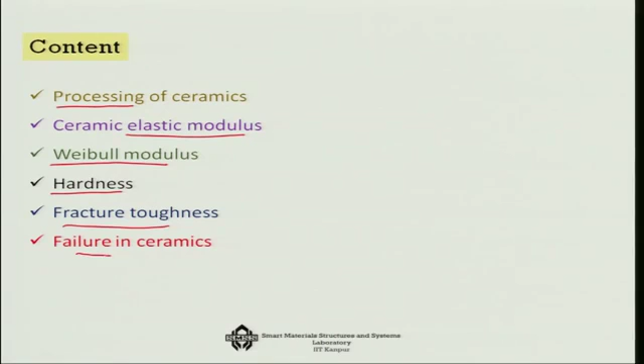Okay, we have discussed the basic introduction to ceramic materials in the last lecture. Today we will see some of the more advanced topics. For example, we will first talk about the processing of ceramics, then we will talk about the elastic modulus of ceramics, and more importantly for ceramics, because there is always a probability associated with ceramics, a kind of uncertainty about any value of the mechanical parameters, the concept of Weibull modulus. Then we have to talk about the hardness, fracture toughness and failures in ceramics.

Now, the first point is the processing of ceramics, because many of the properties of ceramics are actually dependent on the processing parameters. Unlike metals and glasses, which can be cast from the melt and subsequently rolled or pressed into shape, ceramics are generally made from powders, and there are two ways to do it. One is sintering, with pressure and heat, and another, which I will talk about later for piezoelectric ceramics, is the sol-gel process, which does not need heat. Right now, the more traditional one is sintering, and that is what I will discuss in this lecture.

So, ceramic powder is consolidated and densified by sintering. What is sintering? It is a process whereby particles bond and merge under the influence of pressure and heat, so high pressure and high temperature. This leads to shrinkage and reduction in porosity. Here are the powder particles to begin with; as you apply high temperature and pressure, there will be some pores and the particles merge. These are the neck areas and the grain boundaries, and as you apply more pressure and temperature, it gradually shrinks, though there are still pores.

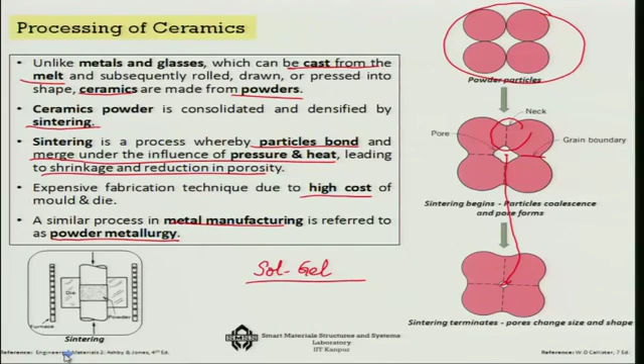So this is how ceramics are processed, and in this process the pores are inevitable. So what is the influence of porosity? There will always be some pores or void spaces between the powder particles even after sintering and subsequent heat treatment. Porosity has a negative impact on the elastic properties and strength. For example, the modulus of elasticity of Al2O3 at room temperature continuously comes down as porosity increases. Similarly, as the volume fraction porosity increases, the strength comes down.

One interesting thing: unlike the modulus of elasticity, the strengths are not single points; they are more distributed. I will talk later about how this distribution is probability related, and that is why there is a Weibull modulus. Now, the volume fraction of porosity plays a very important role, which is the volume of pores over the volume of the specimen. The higher the volume fraction, the more degradation of the material properties you expect, particularly strength.

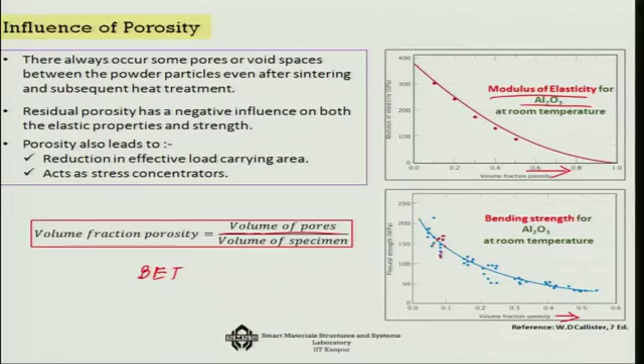And how do we measure the volume porosity? There are several ways. One is called the BET technique, by which we subject these ceramic materials to adsorb gas, and depending on how much gas is adsorbed, we find out the porosity of the particular ceramic sample.

Now, how do we measure the ceramic elastic modulus? It looks like a very trivial question, but it is not trivial at all. Why? Because when you make a sample for elastic modulus determination, say for example this steel sample, you have to make a certain necking arrangement. So this is a dog bone shaped sample.

So, you have to make this dog bone shape, and this kind of a dog bone shape is very difficult to make, with these neckings etc., for the ceramic sample. So, sample preparation is the first important problem. The second problem is that in tensile testing we put these areas for gripping, but this gripping for ceramic material is enormously difficult.

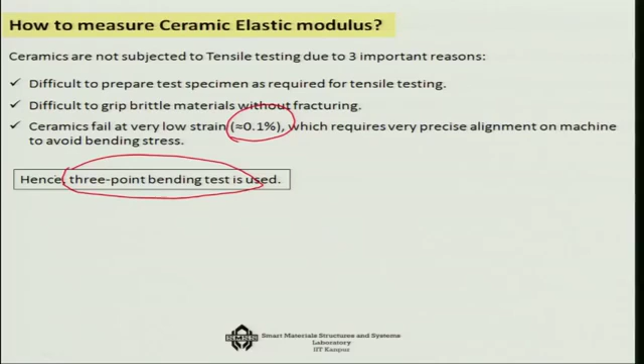And the other point is that ceramics actually fail at a very low strain, something like 0.1%. So, it is very difficult to align a machine and to avoid bending stress. Hence, for testing of ceramics, an indirect way known as 3-point bending is generally used. Let us see what this 3-point bending test is.

As the name suggests, this is a ceramic sample, as we can see here, and it has 2 supports, and exactly at the center a load is applied. So, it is 3-point bending that is happening, with 3-point supports. At the top surface of the specimen, this part is subjected to compression, and the bottom surface is subjected to tension.

Now, you can compute stress from the specimen thickness, bending moment, and area moment of inertia. So, if it is of length L, then L by 2, L by 2, the load is exactly at the midpoint, and the sample geometry, suppose B over D for a rectangular cross section, or it can be a circular cross section depending on what you wish to choose. Now, if it is a rectangular cross section, then with this configuration and with the force applied F, the bending moment is FL by 4.

So, this FL by 4 is the bending moment that this thing is subjected to, and if I know this bending moment M, and if I know where exactly the particular fiber is located, for example, if it is an extreme fiber at distance y, then the stress is My by I. So, I can actually find out what stress it is subjected to.

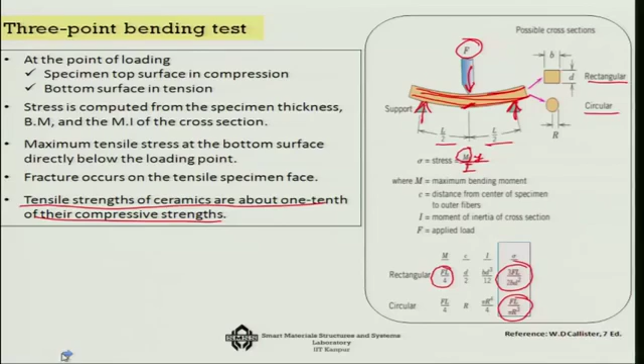Next, we can find out the stress, and if we use some displacement sensor, you can find out the strain, and then plot the stress strain diagram. What you will see is that the stress strain diagram, unlike for metallic samples, is remarkably different here. You will generally find it to be a simple straight line, like you see here for aluminum oxide or glass, with a sharp point of failure. So, there is no plastic region observed, and this is of course the modulus of elasticity when you test them in tension.

And interestingly, if you test them in compression, you would see this kind of failure band happening. So, instead of a single direct failure like in tension, it happens stage by stage in compression. In fact, you can see this kind of step by step failure in silicon carbide under compression, and how, with respect to time, this failure is happening to the system.

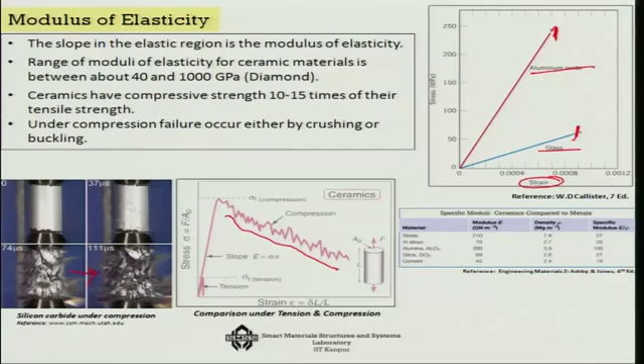And the take home thing is that the elastic modulus is generally quite high, but the failure strain is very low, and the strength is also not very high because of the presence of these porosities. Now, not only is the strength not high, but the strength also varies a lot. We can very easily demonstrate this if you take these chalk samples and try to break them: you will see the load you are applying for one chalk sample, and how the samples have broken, much unlike your ductile failure samples.

So, you can consider these with respect to the ductile failures that happen in metallic samples. You can see that, much unlike the ductile failure, the brittle failure is much different. There is no necking, it just falls apart. And not only that, the stress at which it falls apart: if I take another chalk sample, you may actually get more resistance to failure. So, it varies from sample to sample. That is the point I wanted to stress.

Now, because of this variation, you need to know something called the Weibull modulus, because there is a statistical way of representing the properties. Because there is a distribution of physical flaws, you have to have a mapping of the probability of failure of a component at varying stresses. You have to know that probability of failure, and from that obtain the Weibull modulus of a sample. So, how do I know the probability of failure?

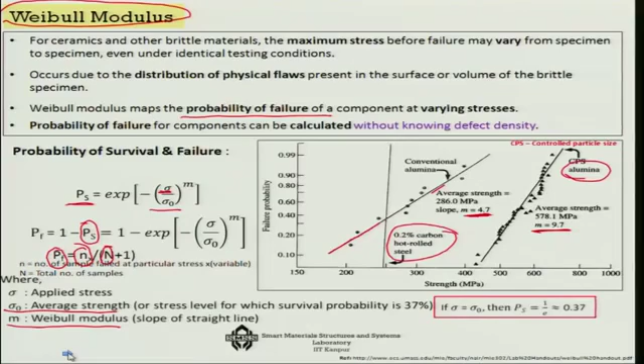So, to do that, we have to keep track of how this Weibull modulus changes as I introduce various reinforcements, composites, etc., or change parameters like porosity, making it more uniform, and increase the value of the Weibull modulus. You can see here, for example, the Weibull modulus m equals 1. For m equals 0, Pf is independent of applied stress; m equals 1, Pf is an exponential asymptotic curve; m equals infinity, Pf is the step curve.

So, large m essentially means there is a narrow distribution of the property. We call it a very crisp probability. That means the material property variation range is very small. On the other hand, smaller m means a wider distribution, a larger spread in fracture strength.

So, as the Weibull modulus increases, you can see these points coming, F or E prime, etc. These are like bulk metallic glasses. Then around A, B, C, these are zirconia based ceramics, alumina based ceramics, or feldspathic porcelains. And with usual glass ceramics, you are somewhere with a very low Weibull modulus. So, that is how the Weibull modulus varies for various ceramic materials.

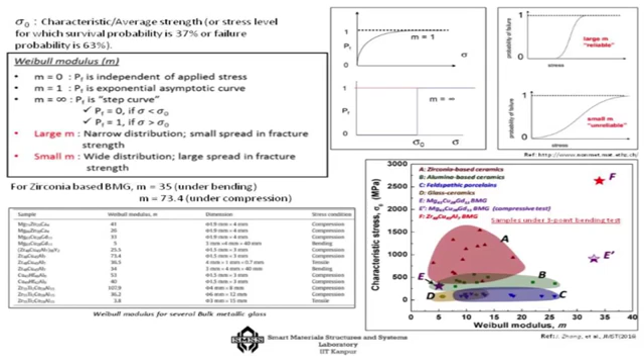Now, then we talk about some of the other properties like the hardness, which is very important, because I told you earlier also that one of the good applications of ceramics is in terms of shaping or grinding or giving a smooth texture to metallic tools, etc. So, ceramics are hard and brittle due to the presence of the ionic and covalent bonds, which have much higher bond energy in comparison to the weak bonds like hydrogen bonds, etc.

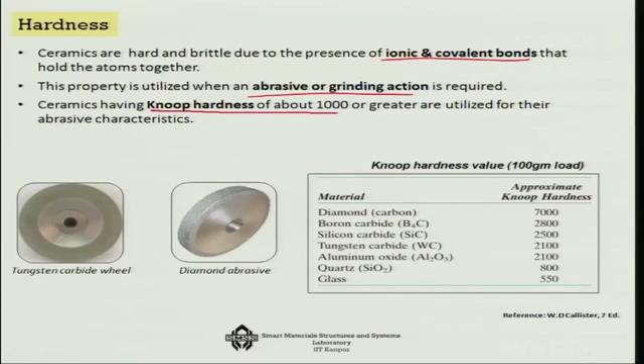And this property is utilized when we are making abrasive or grinding action. Ceramics having Knoop hardness of about 1000 or greater are utilized generally for their abrasive characteristics. Suppose this one is a tungsten carbide wheel or diamond abrasives. These are generally used, and you can use them for sharpening metals. Their Knoop hardness, if you look at it, diamond is about 7000, boron carbide 2800, and anything greater than 1000, that means up to alumina, you can use for abrasive or grinding purposes.

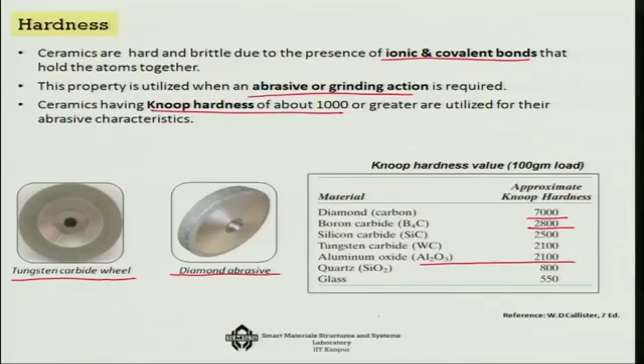The next important thing in ceramics is the fracture toughness. Now, ceramics, being highly brittle in nature, have low fracture toughness. I have not talked about fracture toughness earlier. It is a material property which talks about the ability to resist crack propagation, and also the energy that is required to grow a thin crack before failure occurs, and the unit of it is megapascal times square root of meter.

Now, low fracture toughness means brittle failure, just like earlier I showed you brittle failure of the chalk samples, and high fracture toughness means ductile failure. I showed you also the ductile failure of the mild steel samples. Fracture toughness is defined in terms of the product of these three, where Y is the dimensionless parameter, sigma c is the critical stress that is needed for crack propagation, and a is the crack length.

So, there can be various types of cracks like interior cracks, as you can see here, or edge cracks. Also, there are various ways in which we can apply the stress, and depending on that the failure occurs; I will talk about it at a later stage.

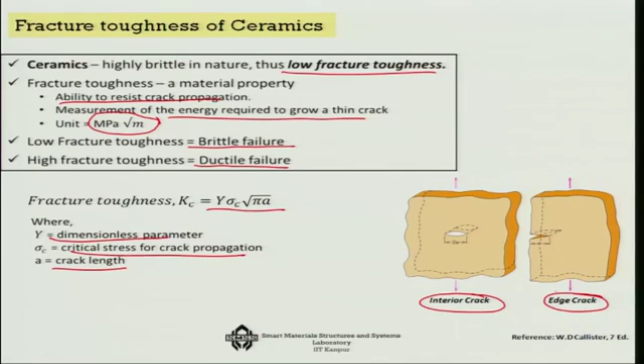Now, fracture toughness is a very important parameter, because we would always like a sample to have higher fracture toughness. So, this is an Ashby chart which gives a relative comparison of fracture toughness, and as you can see here, the ceramics are somewhere at this point, and this is where we have the fracture toughness of the metals, then polymers, and then the composites.

Now, if you compare, you can see that aluminum alloy has a fracture toughness of about 24 megapascal square root meter, and if you compare that with alumina, for example, very low, 2.7 to 5.0. So, we can see qualitatively that the fracture toughness of ceramics is lower in comparison to metals, polymers, and composites. One can say that just by shutting eyes itself.

And among the metals, of course, there are variations, like mild steel has a higher fracture toughness than aluminum alloys. And among the polymers, even though they can sustain a much higher strain, their modulus of elasticity and yield strength being low, you will not get a fracture toughness beyond a certain value. And with composites, you will get a kind of mixing of these possibilities.

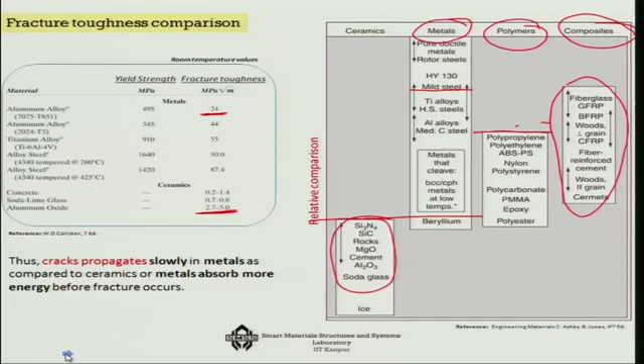Because you can have metal ceramic composites where the metals will have a high fracture toughness, and because of the ceramics it will come down a little bit, and you can have ceramic polymer composites, where once again polymers will have slightly higher fracture toughness and ceramics will bring it down, and you get some kind of an average value for the composites. So, that is the fracture toughness comparison of various types of material. This is particularly important whenever we are considering the reliability of a particular product.

Now, failures in ceramics have certain telltale signs. One is that there is negligible plastic deformation, meaning that it will give you almost no warning. In fact, you hear about the collapsing of bridges quite often. Many of these bridges are made of concrete, and concrete structure has predominantly ceramic materials in it.

Also, it is having some reinforcements like mild steels, but if this reinforcement is below a particular level, below a critical level, then the failure gets governed by the ceramics. So, it is a ceramics governed failure that comes into picture if the reinforcement is given below a particular level due to poor quality maintenance, corruptions, etc. Now, if that happens, then this kind of structures will be susceptible to sudden failures.

You will see bridges collapsing suddenly. Why? Because the steel that is supposed to be going there is not given, or it got corroded or something, and hence it is no longer a metallic driven failure, where you will get a warning for quite some time because it does not fall all of a sudden. On the other hand, if it is a ceramic governed failure, it will be a brittle fracture and it will happen all of a sudden. So, this is something that we see many a times.

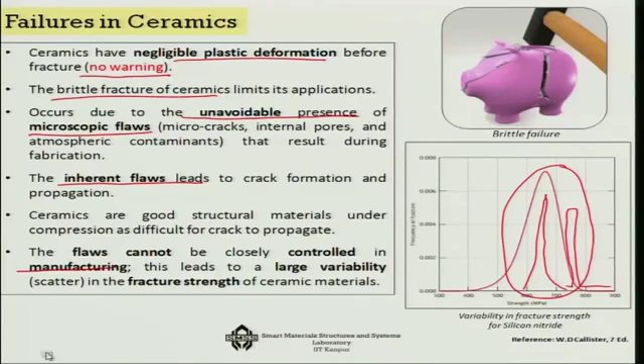So, this will become sharper and sharper as you can control it more and more. In fact, for metals you will get it almost like what we call a crisp probability. I told you that is the straight line scenario. So, that is why the manufacturing process is so important in the ceramics.

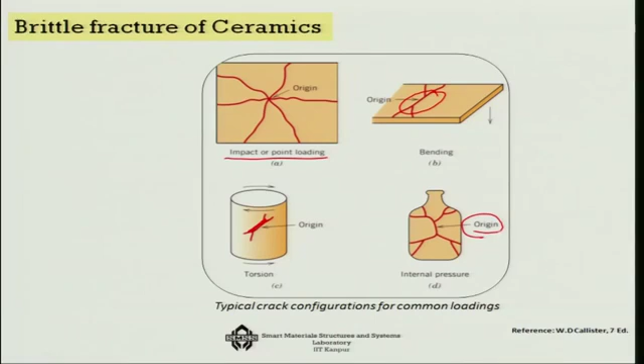And then if it is due to internal pressure, you would see this type of a failure. So, by looking at the failure, the crack can actually give us an idea of whether this has happened due to impact, bending, torsion, or internal pressure. So, for prognosis, that is very important.

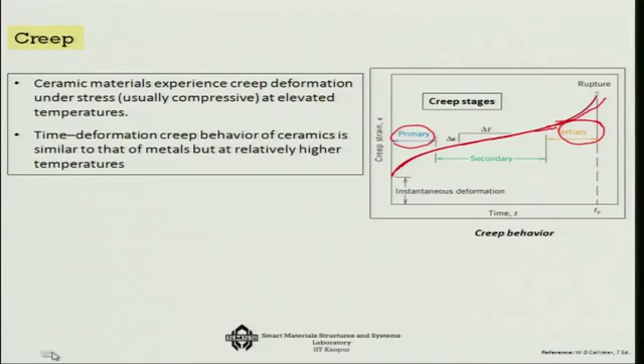The next important thing is the creep, because ceramic materials do experience a lot of creep under stress and at elevated temperature. If you look at this creep, there are actually three parts of it. First is the primary creep, where the creep strain is increasing with respect to time. Then it gets stabilized, that is the secondary part, and once again it increases at a sharper rate at the tertiary region. So, as the time continues, this happens at a sharper rate towards the end. That is the nature of creep in the ceramic materials.

Now, how do we make ceramics conductive, because ceramics are generally insulating in nature. There are two ways in which we can make the ceramics electrically conductive. One is that you raise the temperature, because at sufficiently high temperature point defects such as oxygen vacancies can arise, and this will lead to ionic conductivity. That is something that happens in zirconia.

The other is to introduce transition metal elements such as iron, copper, manganese or cobalt, or lanthanide elements such as cerium, or actinide elements such as uranium. This can produce a special electronic state in which the mobile electrons or electron holes will increase. Copper based superconductors are one of the best examples: ceramics in general are highly insulating, but superconductors are made by using ceramics along with one of these transition metals, and then you increase the conductivity.

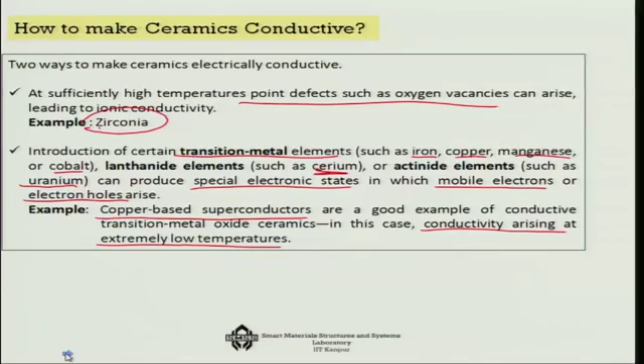Interestingly, this conductivity is arising at extremely low temperature. So, on the one hand we have this high temperature raised conductivity in zirconia, and on the other hand this extremely low temperature superconductivity, where you are adding transition metal elements to introduce conductivity into the ceramics. Of course, you can make ceramic composites to do a similar type of thing.

So, this is where we will come to an end in this lecture. We have discussed metals and ceramics, so in the next lecture it is time to discuss polymers and the classification of polymers.